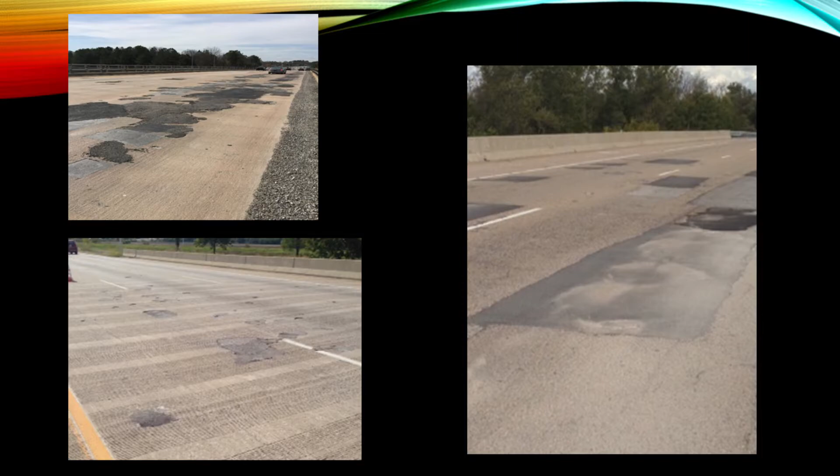And I'm sure you can all relate to this photo here. We've got bridges in various states of disrepair. Some decks you find out there on your system are pretty rough. Some are just starting to corrode and exhibit delaminations and spalling, various patched decks out there. But one of the things you struggle with probably is you get into areas often where you have traffic issues and congestion, and it's very, very difficult to get in and get out and get the work done.

How do you handle it? Are there products out there that can handle it? And I'd like to say, yes, there are. I'd like to think very early strength latex concretes; they're being used by many states and they perform very well. Before I get into the very early strength latex, I just want to talk a little bit about overlay systems in general. When we're talking about dense concrete overlays, there's certain things you need to consider.

Strength for sure is one, but maybe not so much compressive strength, but really the bending strength of the material you're going to use, because usually you're using this in an overlay situation that's fairly thin, maybe 1.5 to 2 inches in thickness. So you need something that's going to be able to deflect with your bridge superstructure, something that has some flexibility and is able to resist crack propagation.

Probably the most important thing though is the bond. You have to be able to get a good adhesive bond, something that's going to interlock and allow for a monolithic application of that overlay to the deck substrate and allow it to act as one unit. You want an impermeable surface, something that's going to keep the chlorides from penetrating down into the base deck.

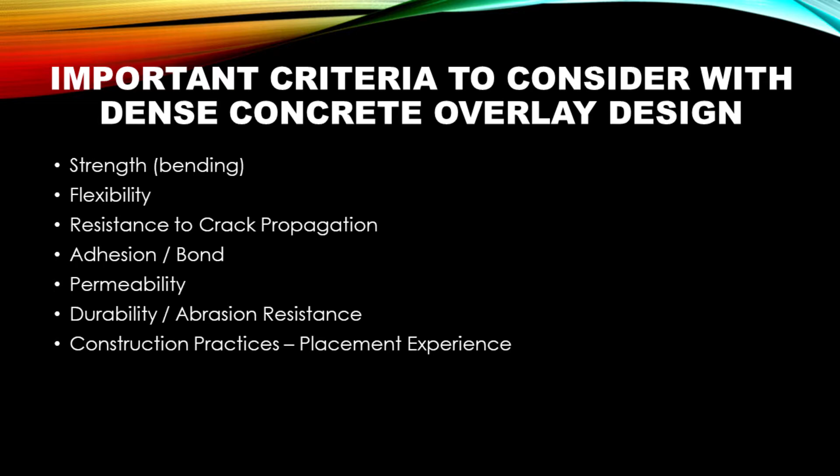And you want something that's going to last. It's got to be durable, got to be able to resist traffic abrasion. You need good construction practices out there to make sure all of these things are happening on the job site and working together.

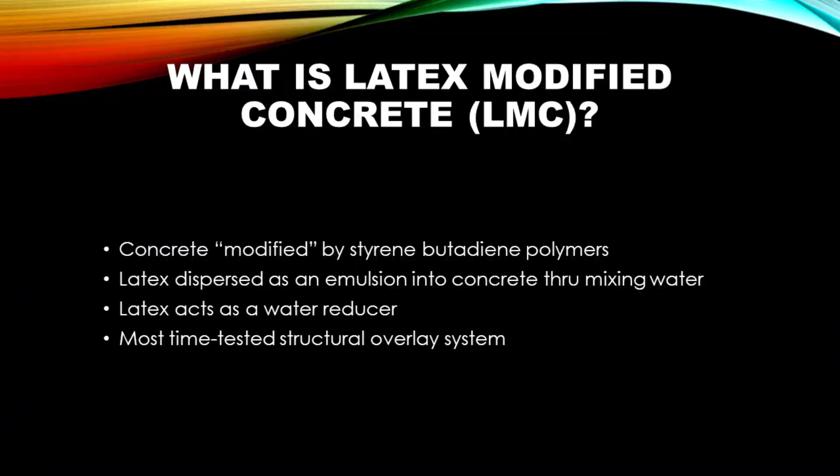What is latex modified concrete? Basically, it's a concrete that's been modified by a styrene butadiene polymer. That gets introduced through the latex as an emulsion, and it gets added into the mixing water, which helps to reduce the amount of water needed in the mix design. And in doing so, it's kind of acting as a water reducer, so it's giving you the advantages a water reducer admixture would provide.

Now, one of the things about latex concretes is they've been around a long time, 50 years. The late 60s is when latex started to come onto the market, and they're still out there working very effectively. Virginia, I think, installed one of the first ones back in the late 60s. They're still a big proponent of latex modified concretes. Mike Sprinkel with Virginia has done numerous tests on both conventional and very early strength latex mixes and speaks very highly of the product and its performance.

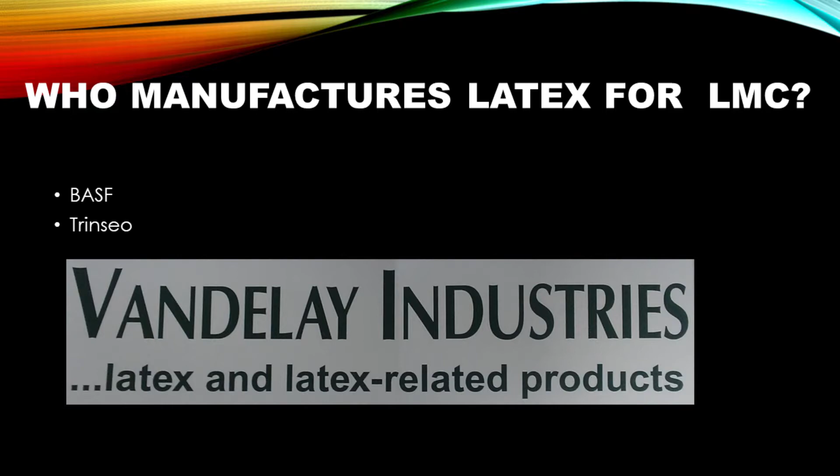But there's also maybe a lesser known third company out there, Vandelay Industries. If any of you remember the Seinfeld series, you might remember George aspired to become a latex salesman. So I don't know if we've seen a lot of Vandelay product out on job sites or not.

About latex in general: when I'm talking about latex concretes and very early strength latex, I kind of talk about them interchangeably as far as their properties and what they do. They work similarly, whether it's using an early strength mix or not. But these overlay systems are good in numerous applications.

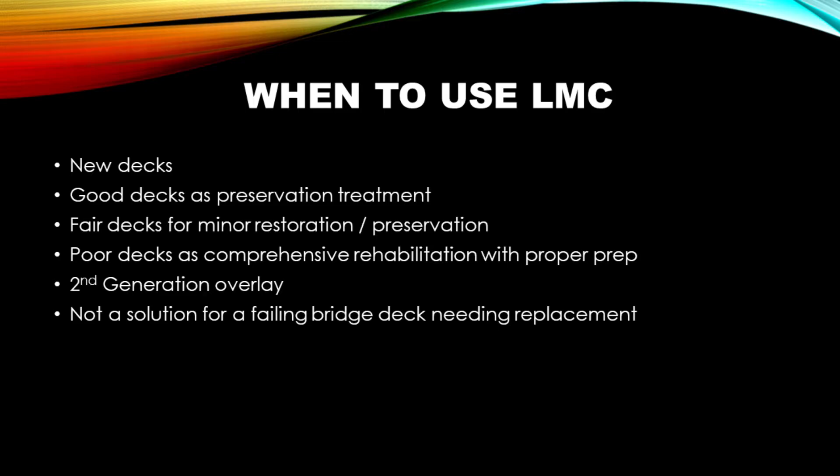They can be used on new bridge decks to preserve your initial installation. You can go in on relatively good decks and prep the deck, or fair to poor decks. So there's a variety of applications based on the condition of the deck, and latex will work in all these applications. It's just a matter of the surface preparation.

It may be hydrodemolition, but it doesn't have to be. It can be milled. As long as you have a good sound substrate to get the overlay on, it can perform. You can even do it in second generation overlays, where we have an overlay that's outlived its life and it needs to be replenished. You basically remove the overlay, prep it, and put another overlay system on it.

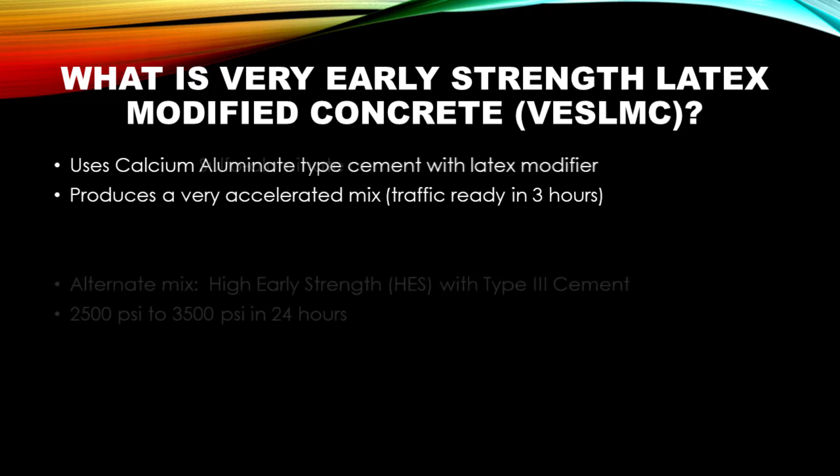It's not going to be a cure-all for everything, though. If you have a deck that's in need of replacement, you're not going to solve it with a latex concrete. The early strength latex uses a calcium aluminate type cement with the latex modifier. This is what allows it to develop an accelerated set time, 3 hours. You can go with a Type 3 cement. You can gain strength within a 24-hour period generally with a Type 3 mix.

When are you going to use the early strength, though? That's the question. It's basically going to be when you have critical time issues. It's going to be when you have to get in there over a weekend, or you've got very limited access to a work zone. Even overnights in extreme cases; we've seen this product being used in overlay and inlay type applications out there.

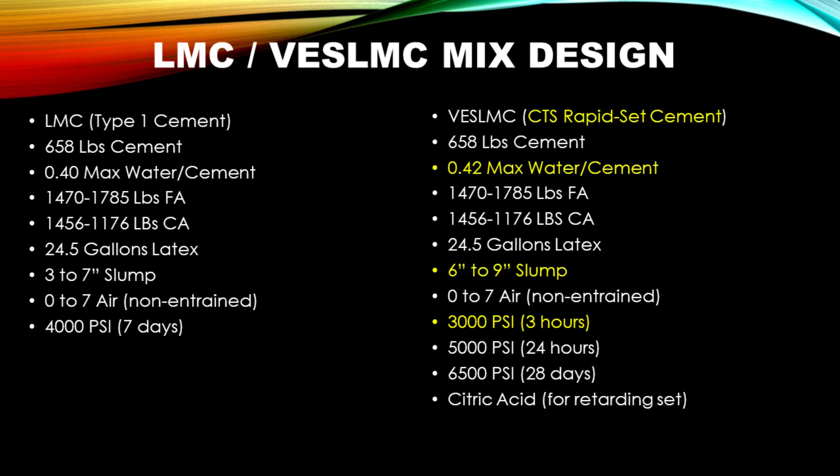The mix design is really not that much different than the conventional mix design that we'd see for a Type 1. The only thing different is going to be your type of cement. We see the CTS Rapid Set cement as a very effective cement with this particular design. The water cement ratio is going to be just a tad higher. Slump's going to be higher. Strength is going to be achieved. You're going to get about a 3,000 PSI break, give or take, in that 3-hour window.

Some of the things to consider with the early strength mix: specs, of course, are going to be critical. You want to have a good, tight spec, and then your on-site inspection needs to be very good. You might think you have a good spec out there that's very easily attained, but maybe it doesn't read quite the way you think it should.

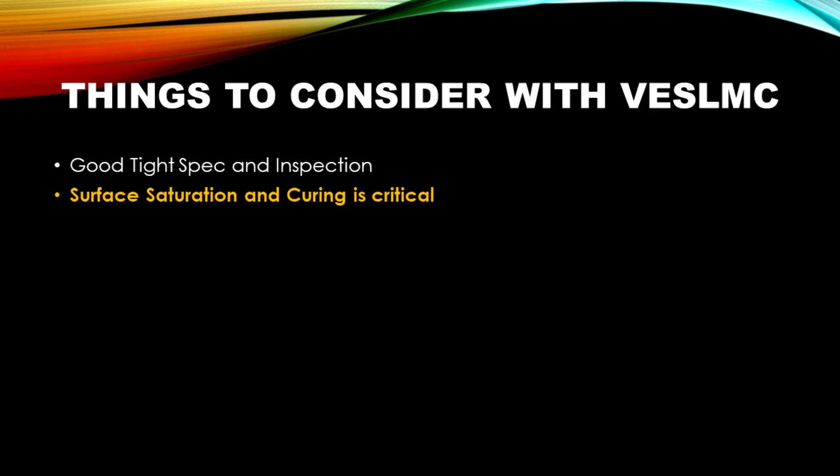Surface saturation and curing are extremely critical with these latex mixes, especially the very early strength mix. You have to have a good saturated surface dry condition that you're putting the mix down on, and then you have to have immediate curing with wet burlap during the curing period. You need to be able to lock that overlay in with moisture top and bottom.

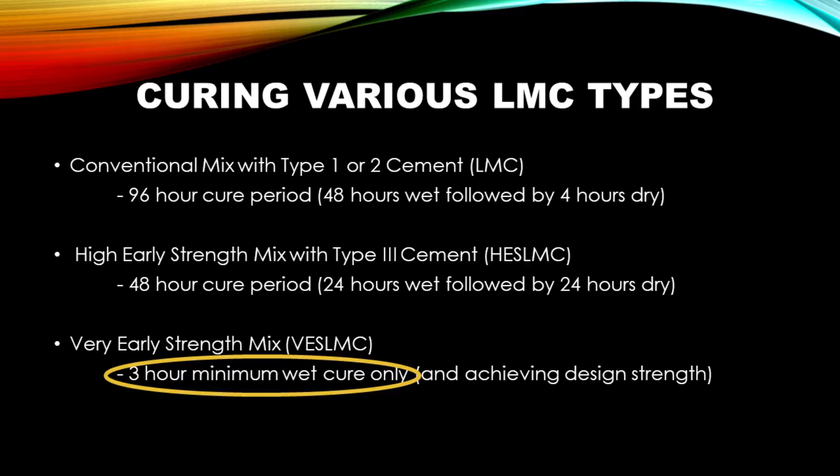The conventional time for curing with a Type 1 is going to be a 96-hour period with 48 of that being wet cure. But if you'll see down on the very early strength mix, a 3-hour minimum wet cure is all that's required. Even the high early strength Type 3 is going to be a 24-hour wet cure. So that probably isn't going to give you what you want if you're trying to get a weekend application to work for you.

Contractor experience is always helpful. Some states actually put into their specifications that they want to see contractors that have a certain amount of experience with the same size and types of jobs that they are specifying.

Hydroblast for surface prep, I think, is a really good idea on these very early strength latex mixes. You don't have to, but I find that it's a little added safety factor, because you just get more bondable surface area for your mix to grab to.

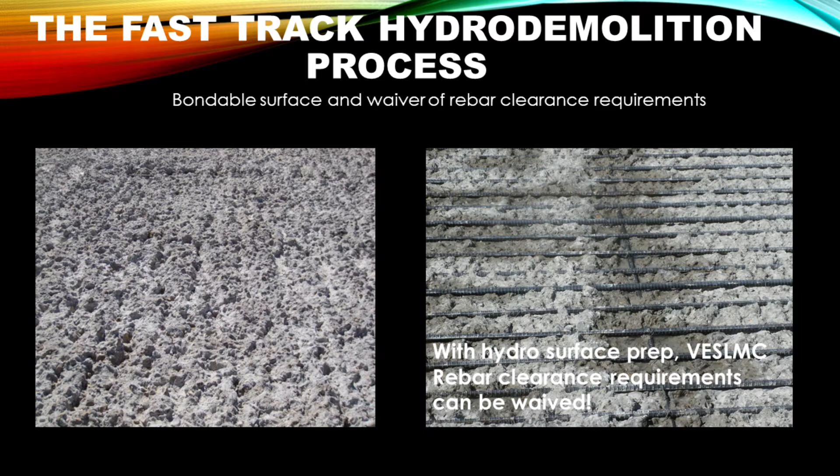As long as you have good sound substrate and you're getting all that deteriorated concrete out of there, you can go ahead and apply that latex mix directly to that substrate. A little bit on installation of the VES LMC. It is a mobile mix product. You're not going to ready mix these products.

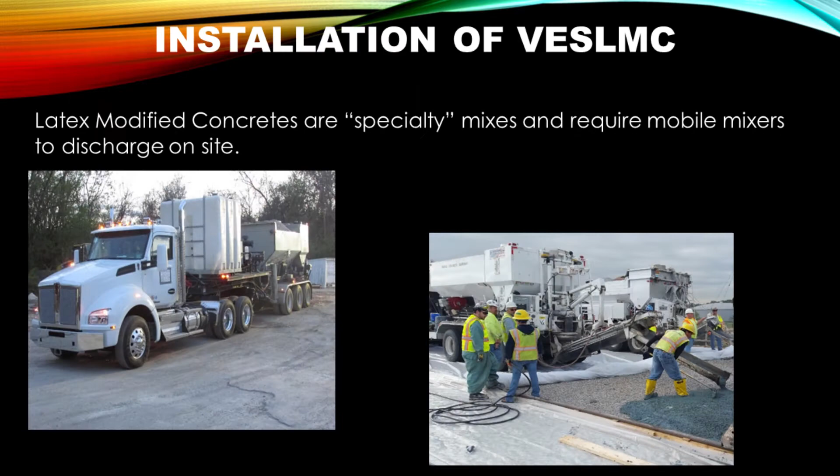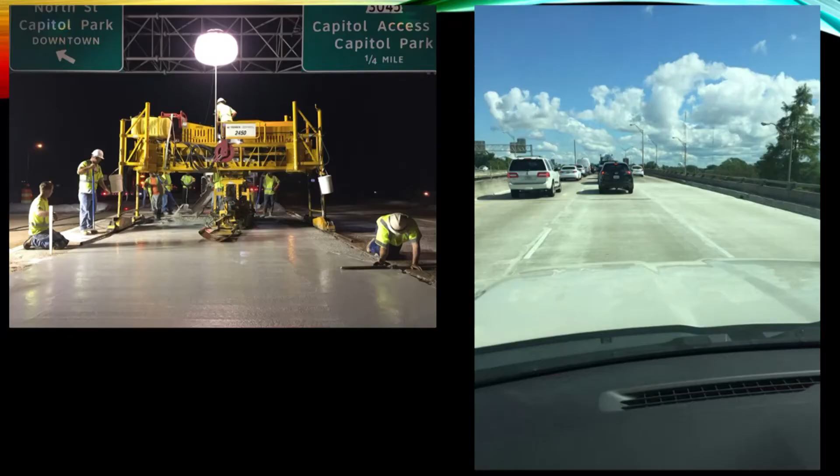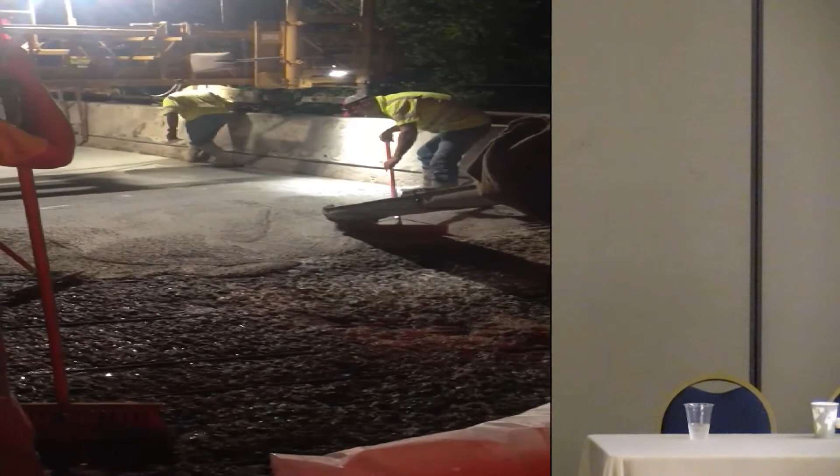This happens to be a job in Louisiana, I think this is on I-10, outside the district office there in Baton Rouge, where they came in and did overnight work. They essentially had a short time window. I think they could get in there and get about 200, 250 square yards per night with hydro and the early strength mix. Just got a short video here showing the application. You can see it's very flowable, just kind of flows.

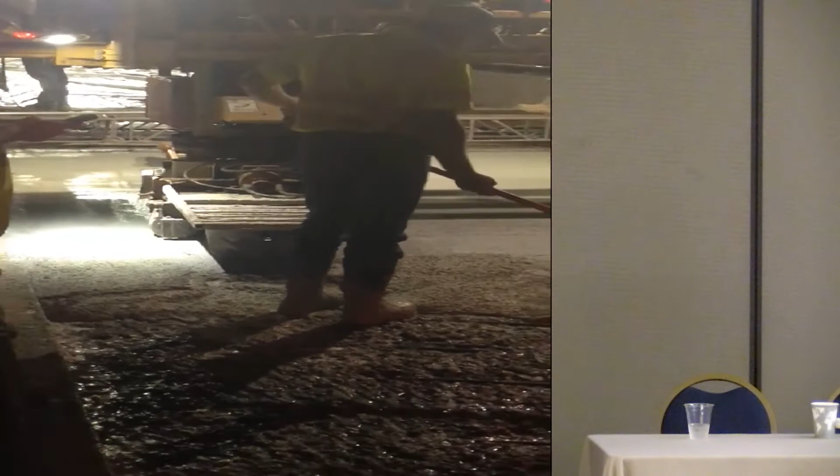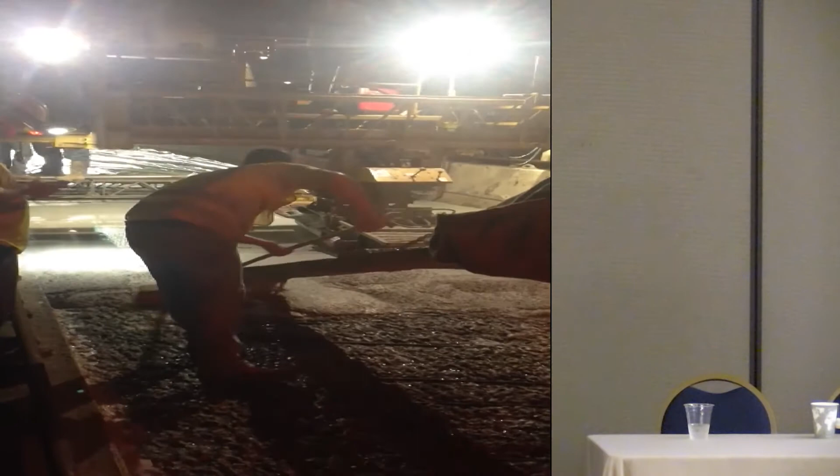You'll see the laborer here, he's going to take his broom here and kind of move it around. Generally, you can back the mobile mixer right up to the finish machine if the deck is allowing that. But you can see he's taking that broom and kind of working that latex in there. The other thing he's doing is he's getting grout on the bristles of his broom. So he's going to take that and smear that now on the vertical faces of the construction joint there between the lane lines.

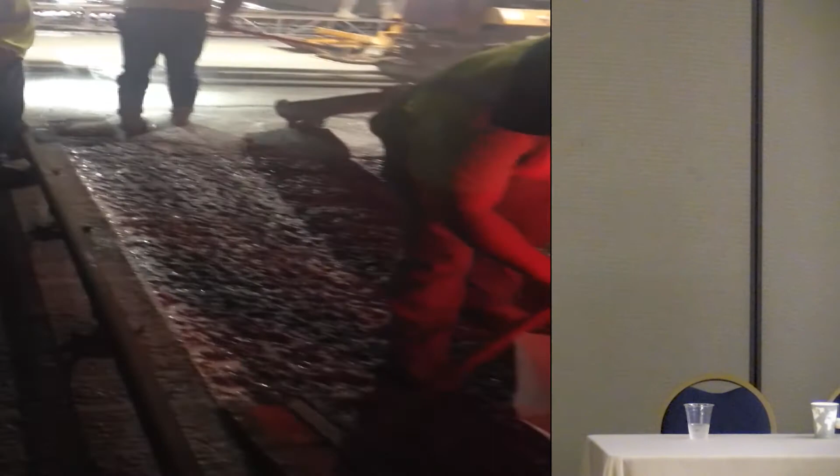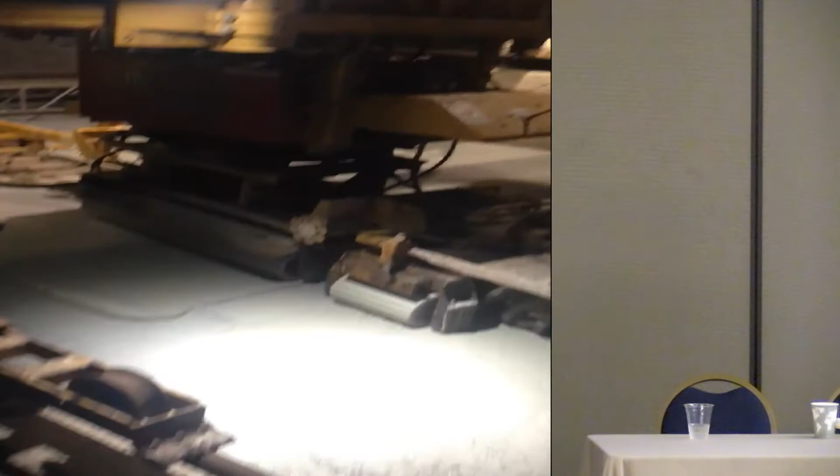You don't have to grout your surface with a hydroed surface. So if it's a milled surface, it's recommended that you use a grout ahead of your overlay. But for a hydroed surface, you don't have to do that. You do want to try to grout the vertical surfaces, like around your joints and the barrier edges.

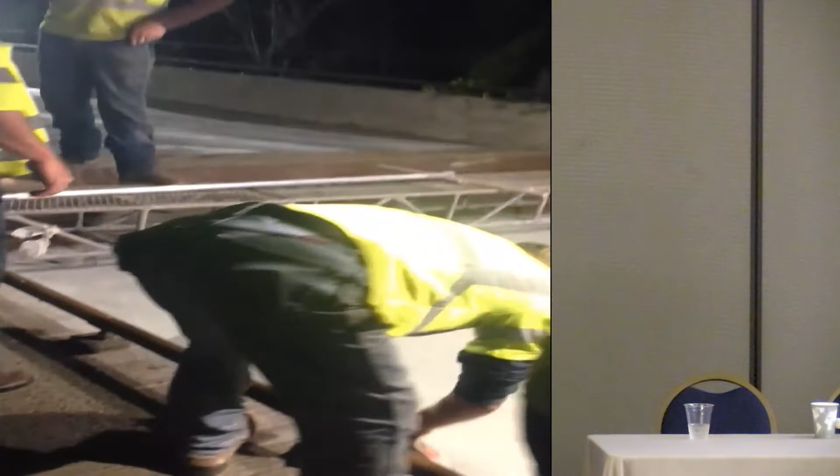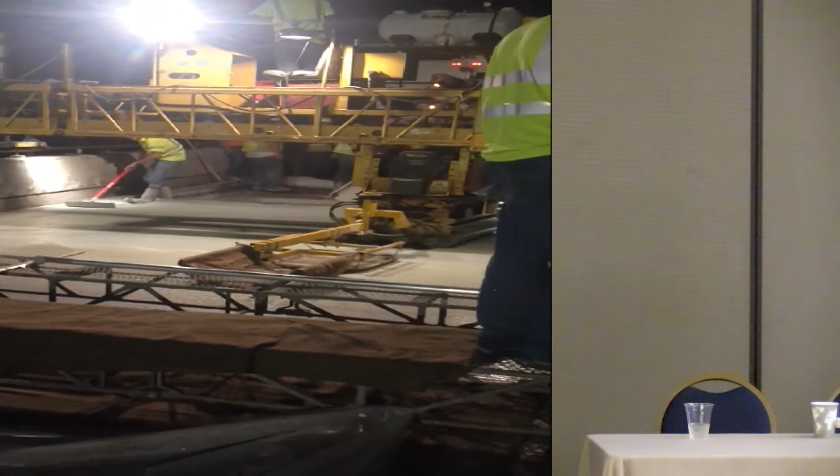And what you want to pick up here is the proximity of the finishing operation behind the finish machine. You can see right behind the finish machine, the bridge there for the tining operation. They're doing a wet cure tine here. They're right behind that finish machine. So there's really no finishing. Once you have your machine set, you've got your rollers and your drag pans. If you get everything set well, it should finish off and seal nice for you.

Then right behind that, you're raking that with the tining rake if you're wet cure tining. And then notice the burlap right behind there on the bridge. So as soon as you can get past the finishing operation, you're tining it, you're putting the burlap to it.

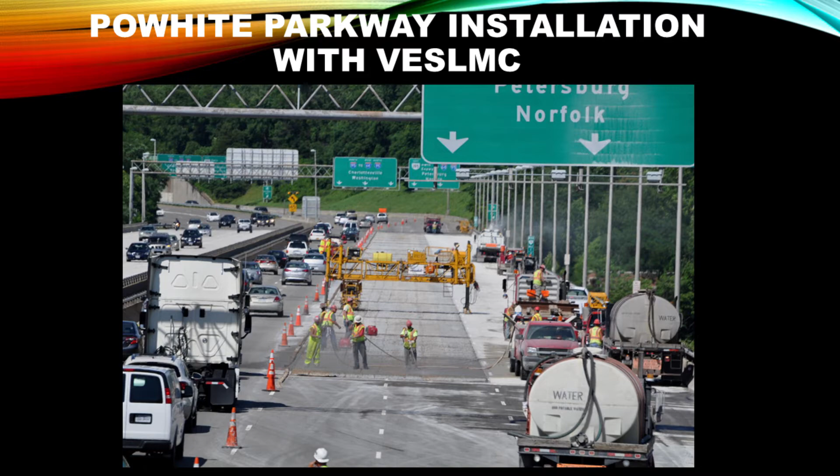I just wanted to highlight this one here at Powhite Parkway in Virginia. This was a job, I think it was set up for 7 weekends of work. The contractor did it in 3. In this particular picture, the first lane is done on the right side. The center is where they're working. And I just wanted to highlight the quantities just to show you how much you can do in a weekend operation if you really put your mind to it.

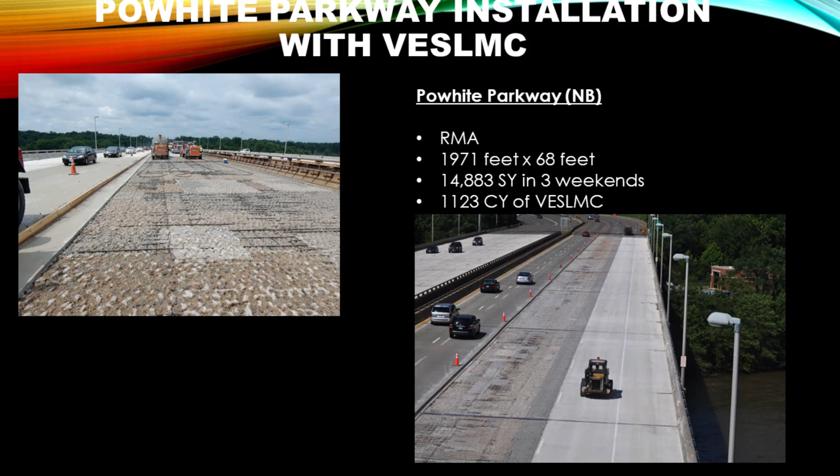Here we've got about 15,000 square yards that was done over the course of 3 weekends. So about 5,000 square yards of bridge deck, 1,100 plus cubic yards of latex over 3 weekends. So you can do a lot of area. It takes a lot of coordination and staging, but you can really cover a lot.

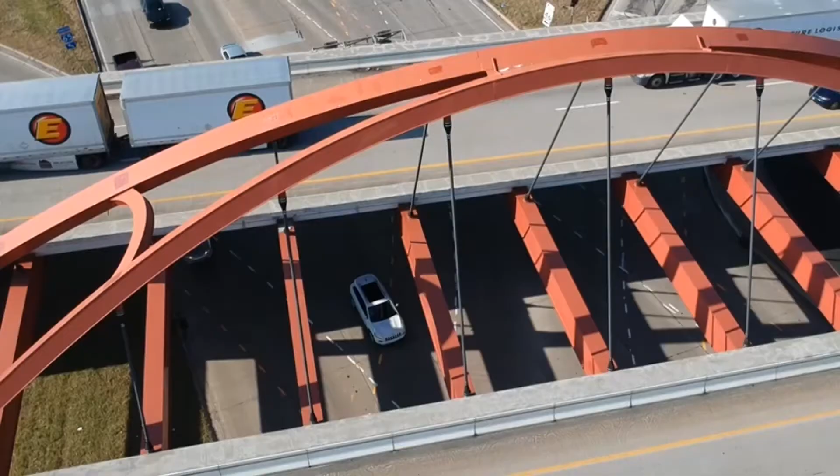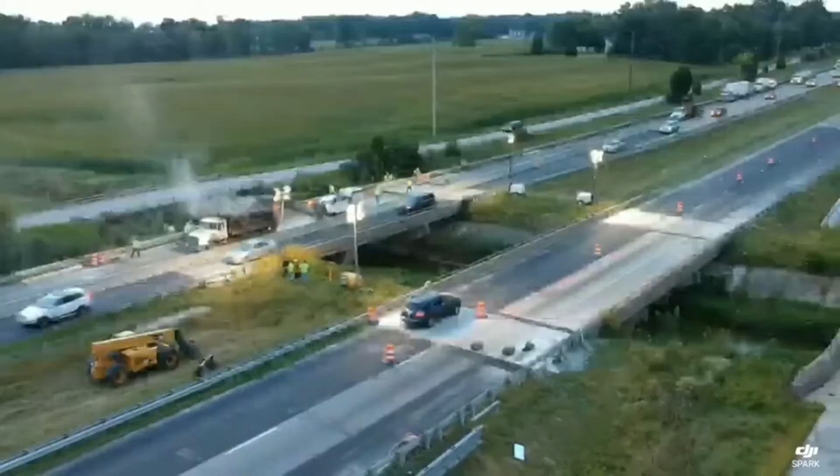I wanted to show you this time-lapse video here. It's got some drone footage in it too. This was done in Columbus, Indiana. This was put together by E&B Paving, so I want to thank them for allowing us to use this video. You'll see the operation. This is done over a weekend, a Friday night.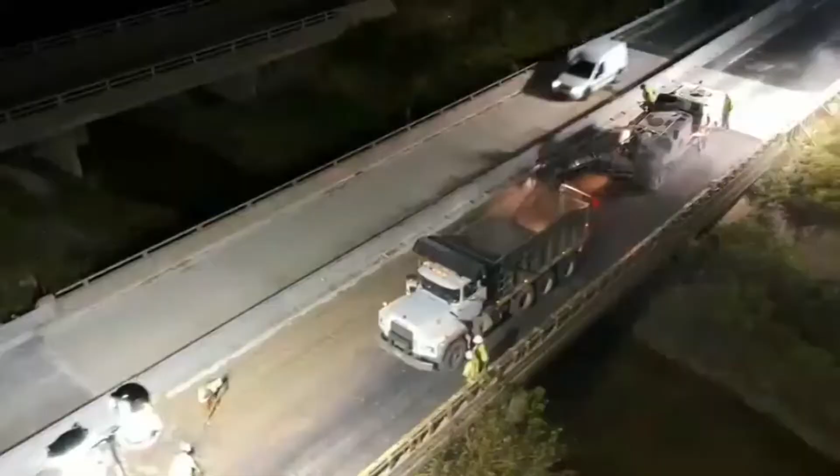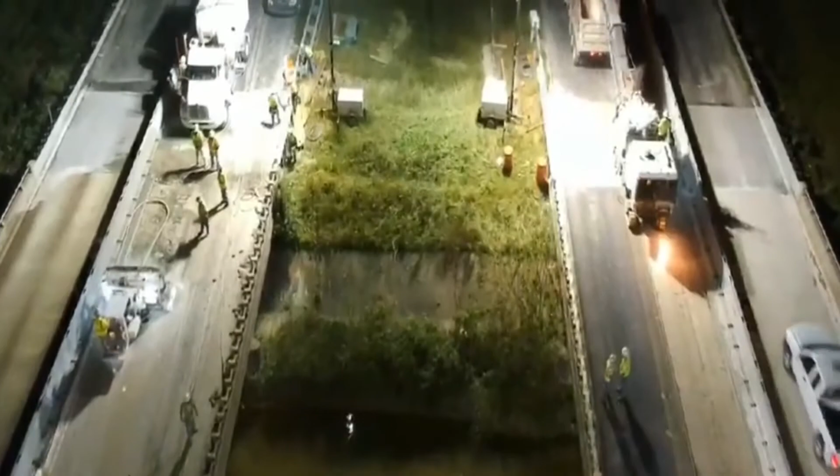They're out milling on the bridge. They're actually doing 2 bridges at one time. They're doing the inside lane in each direction. And you can see the milling operation. Then you'll get a little better view here. If you look to the left, they're hydroblasting on that deck while they're milling on the bridge to the right. So they're kind of simultaneously working on both bridges. So there's not a lot of footage there of the hydro demolition.

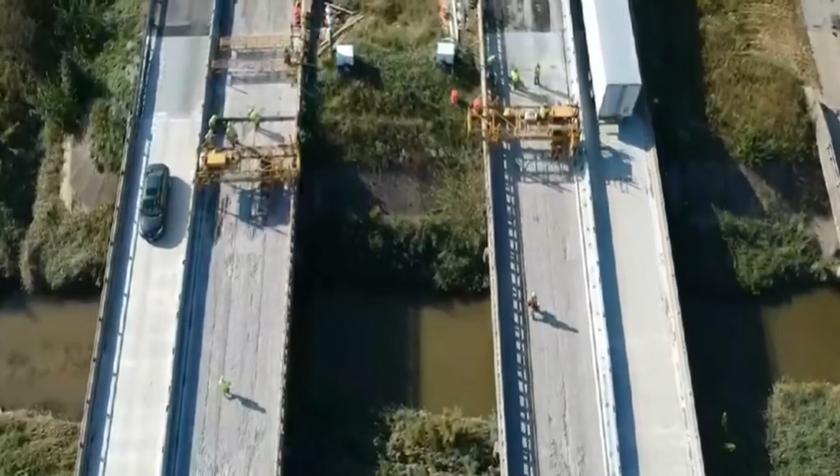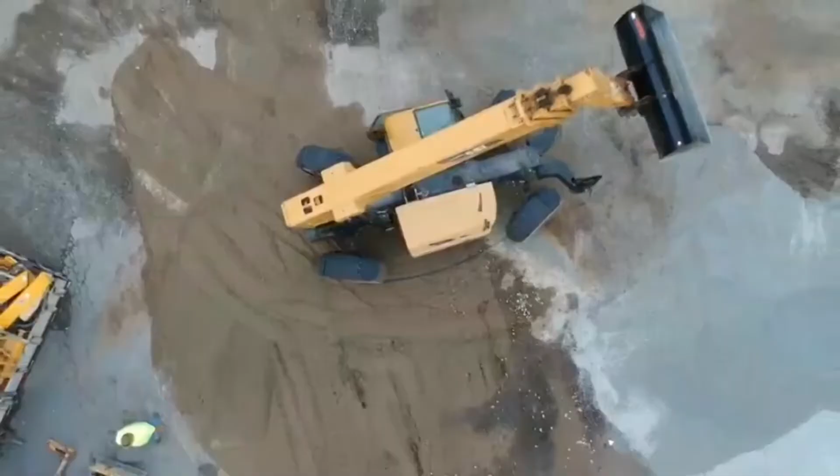The deck prep has been done as far as the hydro work, and they're out on the deck now prepping. You can see where the rebar's exposed. That's where the selective removal has occurred within both of the bridge decks through the hydro demolition operation. And then the rest of it here is going to be the installation of the latex concrete. So here they're at their staging yard loading up their mobile mixers.

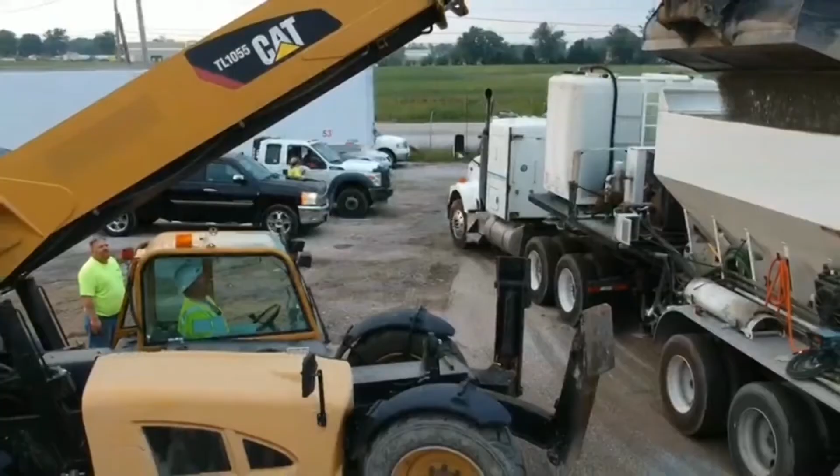And you see your army of people out there, so you get a pretty good idea of how many people they have on these jobs. It's important to have a lot of people out there to make sure you're covering all your bases. But you can see how close the finishing operation is. That's a good overall view from the top side.

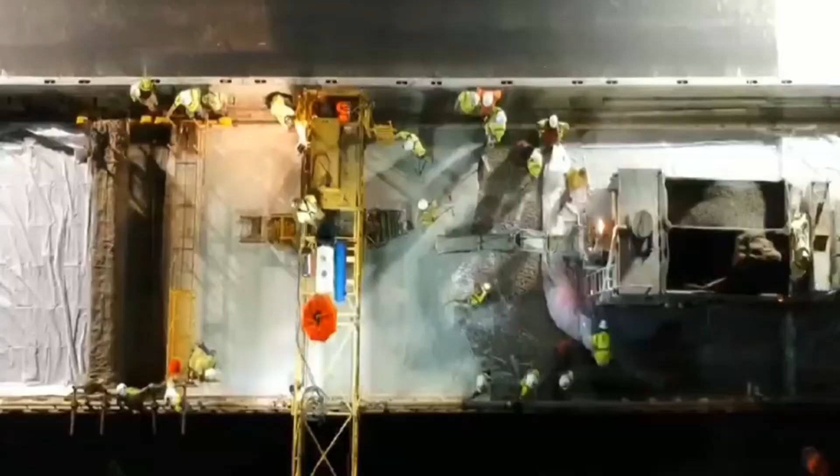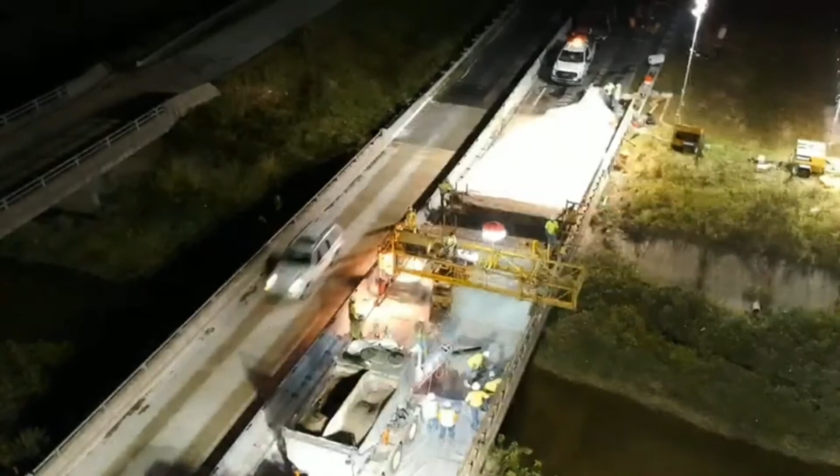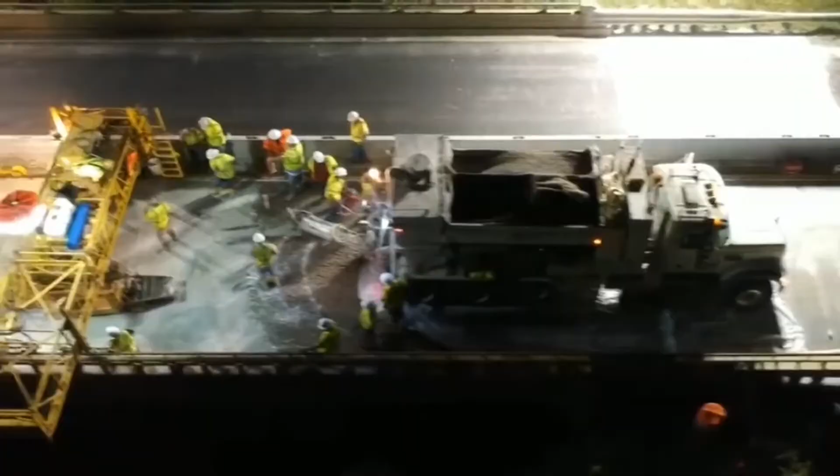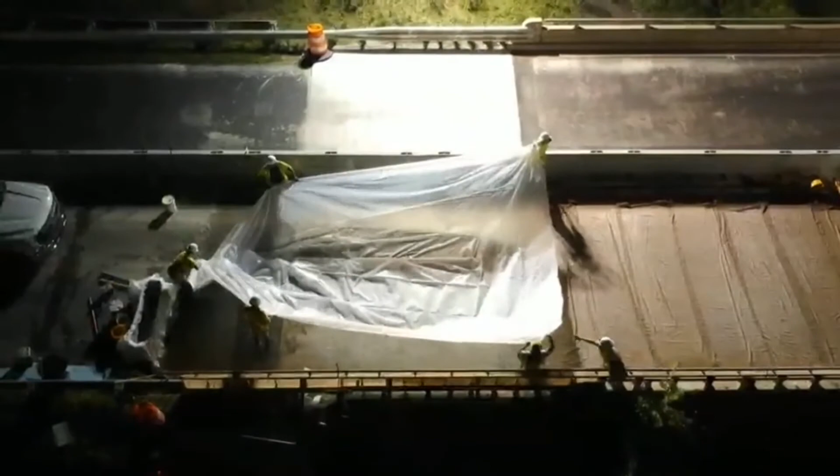You can see the dispensing of the latex, and then how close the machine is with the curing operation immediately behind that. And they're also pulling up the plastic, so that's important too. You get your wet cure started and get that plastic pulled on there too to lock in that moisture and keep any evaporation from happening there.

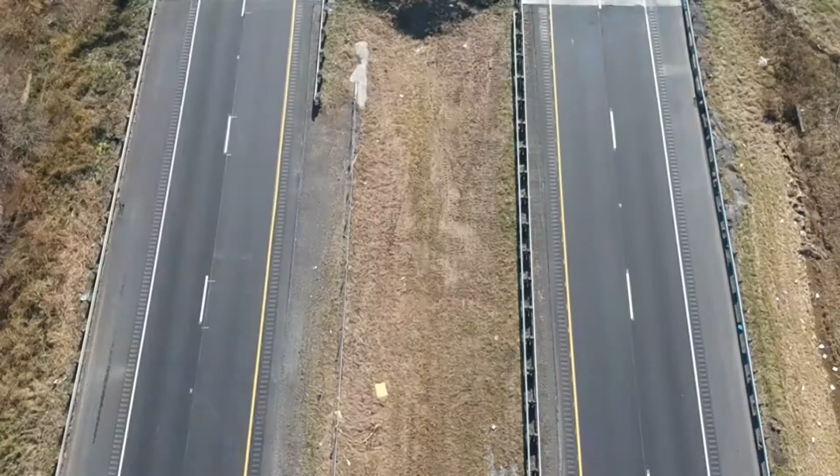And here's just a look at the work zone and how the trucks were all staged through there. So you have a pretty tight work area to have to negotiate and get your equipment through. So there's the final product. You can see they've got it open on Sunday afternoon. So over the course of a weekend, they were able to rehabilitate that particular set of bridges right there.

We think that's been an issue maybe through the years with latex and some issues that have happened on some jobs, so we want to make a point to be much more active in that area. And we're working through the TSP2 group. There's a working group out there, the National Bridge Deck Preservation Working Group that Steve Austin is heading up. So we're kind of under their wing and working to put together material. And Greg had mentioned the pocket guide. We think that could be very helpful for us.

But a lot of what we're going to do is going to include education and training with regard to the materials that are being used, batching, placement and curing, and even the equipment, and then monitoring the performance too. And then we get back to George.

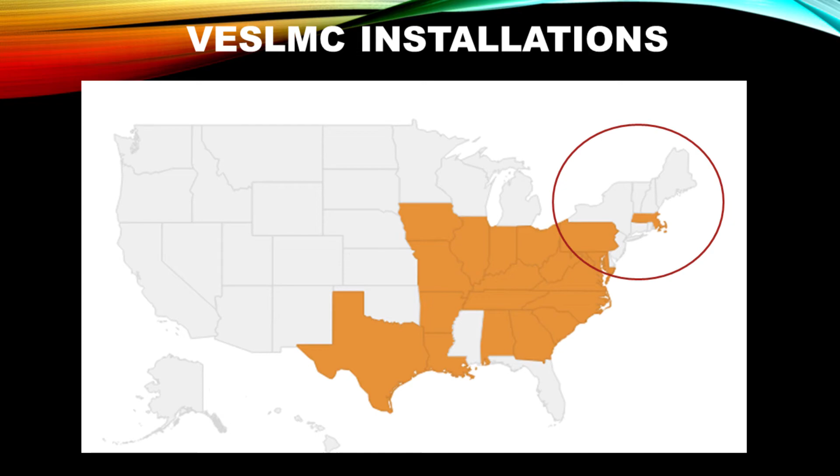So I just thought that was an interesting, inspirational message, because as I look at the map, I noticed in the Northeast, there's not very many orange states there. So maybe you need to get out of your comfort zone and your paradigms and look at opportunities for a process like this.

What's the maximum thickness you can do with the VESLMC? It's been poured pretty thick. It's been poured in 10, 12 inch layers, but generally it's going to be 1.5 inches minimum. And you'll usually find it in the 1.5 inches to 2 1/4 range; that's generally where you're going to place it. It just gets pretty expensive when you have to start placing it in really thick lifts.

Yard? Well, the cost of material is probably going to be in the range of about $900 to $1,000 per cubic yard, I would guess, because I know in Missouri we try to put that in our quotation as far as our bid package. So if we have excess overrun, we'll just pay it as a change order type cost overrun. So it's probably going to be about twice the cost of conventional latex, I would guess.